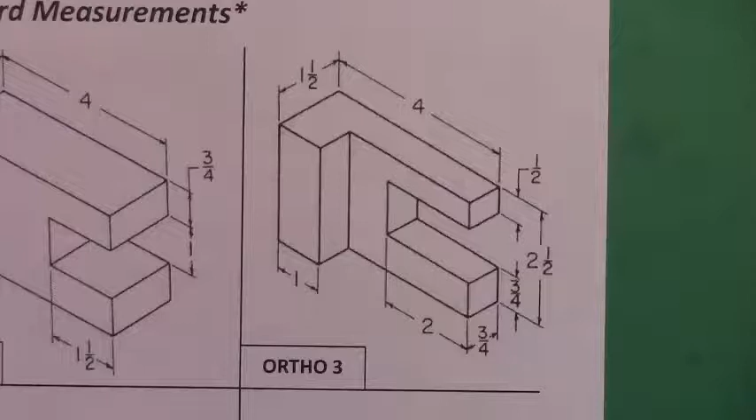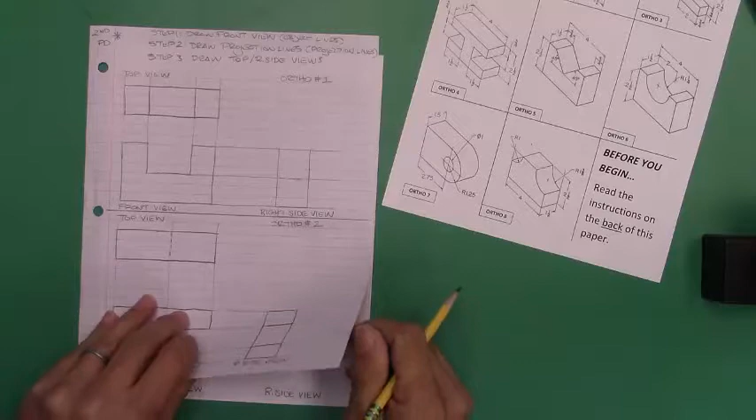Okay, in this video we're going to complete ortho number 3. Before we begin, let me talk about what we've done and where we're headed. If you were here last class period, we completed 2 drawings: ortho 1 and ortho 2. If you were not here last period, simply pick up with ortho number 3 along with the rest of the class.

This is the space we're going to use for our next drawing. Let me also talk a little about this worksheet. If you put it out in front of you, you'll notice there are quite a few drawings we're going to complete today—8 total, 2 from last class and 6 more.

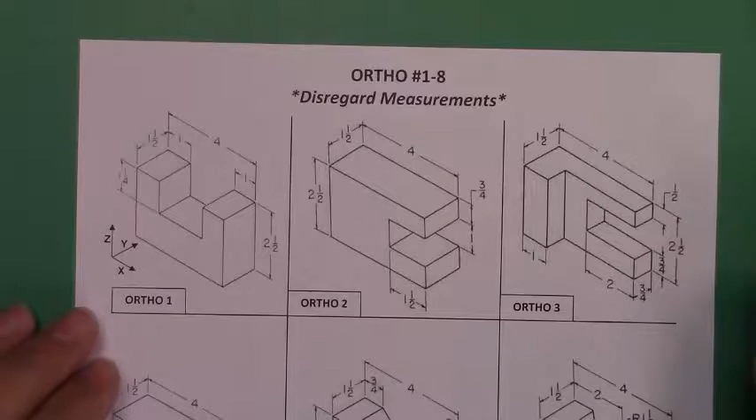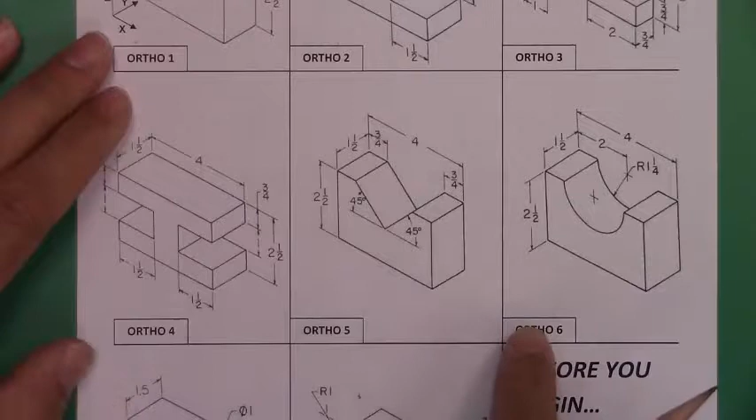You'll notice on the top it says disregard measurements, so let's not worry about any measurements on the paper. Each one is clearly labeled with the orthographic drawing number. We did these 2 last period, now we're picking up with number 3, and we'll then move on to 4, 5, 6, 7, and 8. You can see we're now including arcs and circles, along with vertical and horizontal lines.

Before we start, we're going to read the instructions on the back of this paper. Go ahead and flip the paper over. You'll see this much clearer on your paper, but follow along with me.

First, the step-by-step instructions: you need a sharpened pencil, an eraser, and your notebook, which has the paper we'll be drawing in. No rulers—everything is freehand. If you have not set up your paper, your teacher or substitute should have shown you the instructions on how to set up your paper for these orthographic drawings.

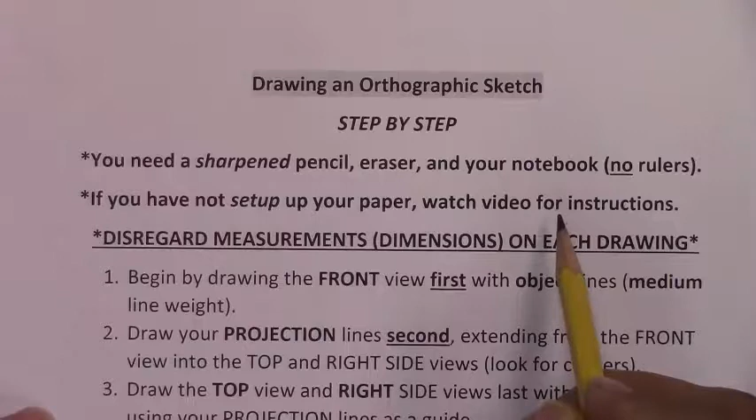You should now have 2 sheets of paper: one for ortho 1 through 4, and a new one for ortho 5 through 8. Disregard measurements on the drawings as mentioned—take what you see and try to redraw it as accurately as you can.

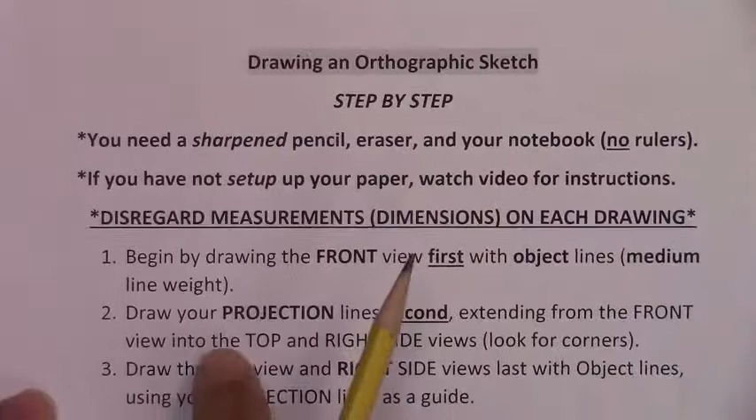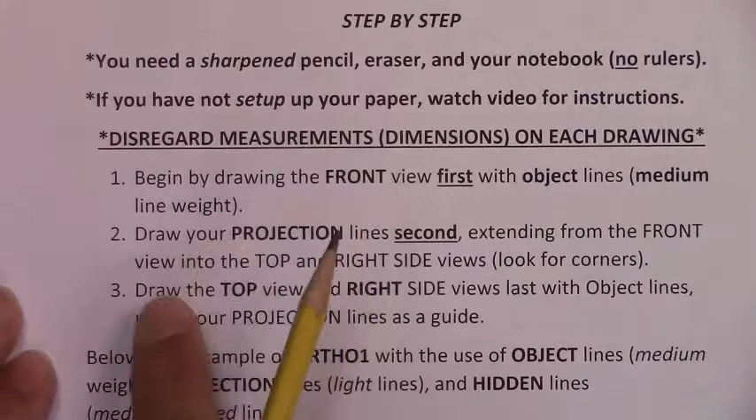Here are the simple steps, which we discussed in class. Number 1: begin by drawing the front view first with object lines, using medium line weight. Number 2: draw your projection lines second, extending from the front view into the top and right side with light lines.

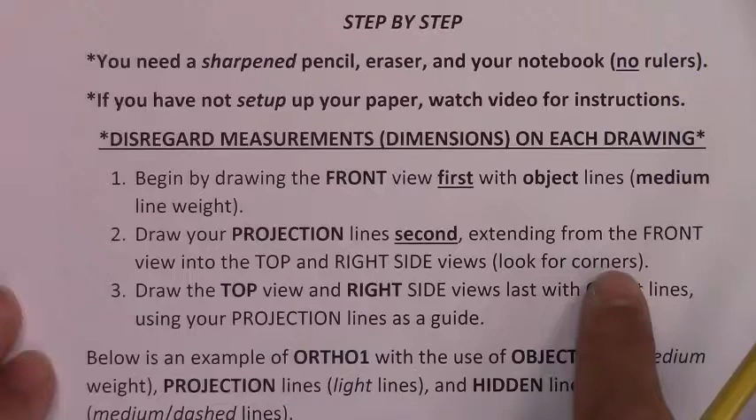We're always looking for corners. Depending on the view, from front to top, look for vertical lines; from front to right side, look for horizontal lines. Last but not least, draw the top or right side view.

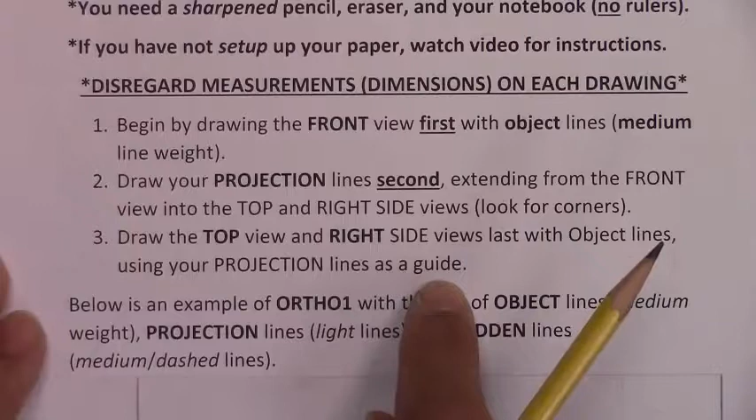It doesn't matter which one you decide to start with—object lines, once again medium weight lines. Use your projection lines as guides. Also remember, you may have to include hidden lines as well, which are the same weight as object lines, medium line weight.

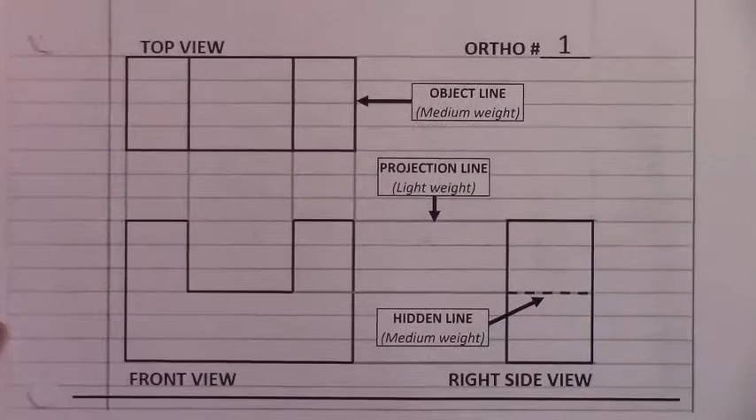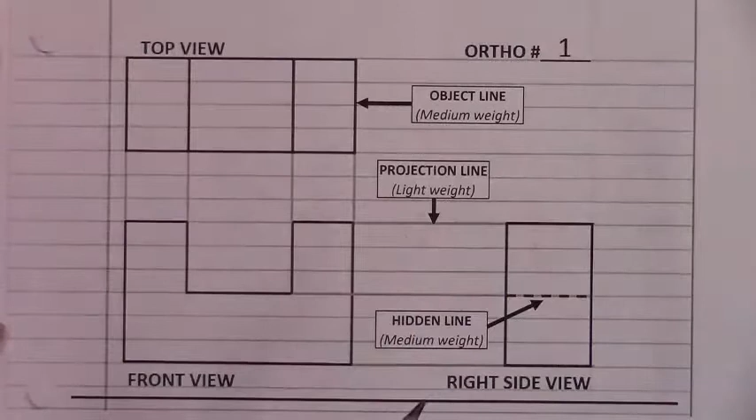If you look on the lower half of this paper, here is an example of something we did last time. You can clearly see the difference between my object lines, which are darker, and my projection lines, which are lighter. You can also see I included a hidden line, which is a dashed line, the same weight as my object lines.

So we're now going to go ahead and begin ortho number 3.

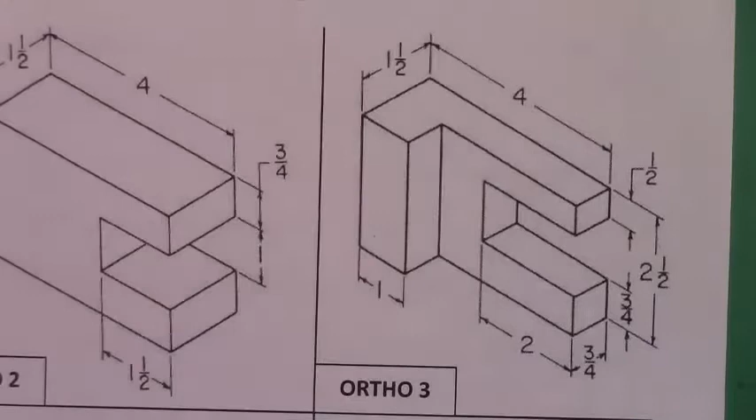Let's take a look at this paper and examine this drawing real quick. Here's how the format's going to work: you'll hear me talk a little about the drawing, and I'll then either draw the front view or not. Your teacher or substitute will then pause the video, giving you time to complete the missing views. They'll hit play and you'll then watch me draw the remaining views.

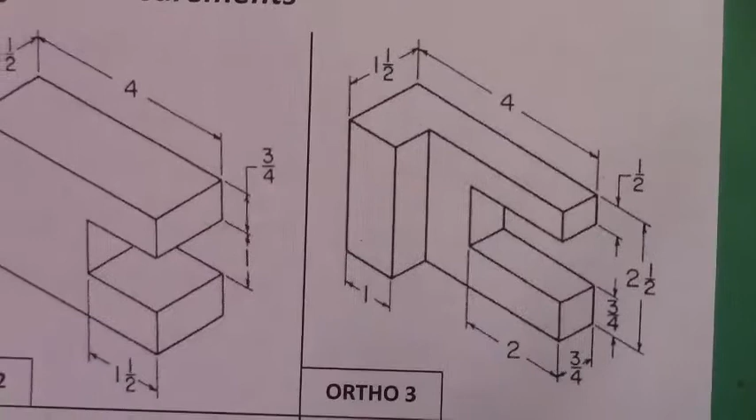So let's take a quick look at ortho 3. First, we always start with the front view. You can see there are 2 faces—here's a face and here's a second face. That's going to be the first thing we draw, the front view of this object.

We're then going to extend our projection lines. We can see that the top view is going to have this face. But if you look here, something has been cut out from the object. We probably will find that there could be some hidden lines, or a hidden line, in the top view.

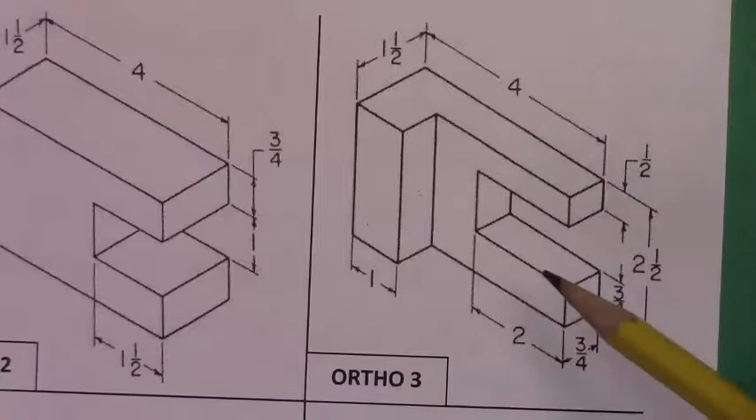And then when we draw the right side view, you're looking at the object from this direction. There's a face here, and a face here, along with a face here. So we're going to make sure those faces are drawn accurately. Once again, objects are drawn accurately with the correct use of projection lines.

So let's go ahead and I'll get you started. We're going to take this drawing here, so keep it next to you. And we're going to start off by drawing the front view. Remember, we're going to see 1, 2 faces to get this drawing started.

So let me begin it, and then you can finish it with the time your teacher is going to give you. Let me go ahead and just zoom in a little bit to my front view here. Remember, make sure you have enough space for your top view. So here's my front view.

Okay, I'm going to go ahead right now and draw what you are also looking at on your paper. We can see right here, it looks like there is this rectangular shape. Remember, I'm drawing with object lines.

And then you can see that there's a shape that almost looks like a U on its side. I'm going to draw that second. You probably remember that these drawings were done in Inventor, which is why they probably look very familiar.

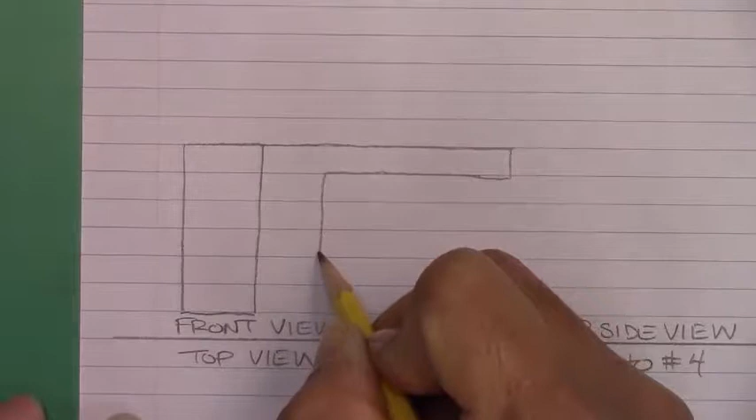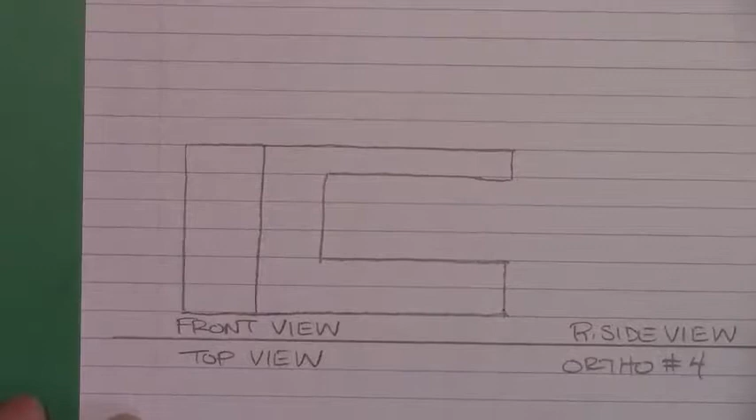And I'm going to try to keep things as close as possible to the original. Okay, now once again, draw as close as you can to the original. The reason I made these two different is because one is thinner, one is a little bit wider, and that's why I made these two look different, just like the drawing.

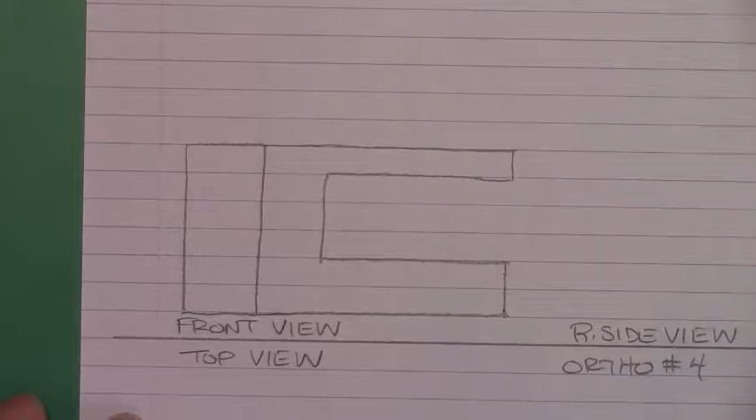So at this point in time, your teacher is going to pause the video. I'd like you to extend any projection lines that you have and then finish the top and right side. So let's pause the video.

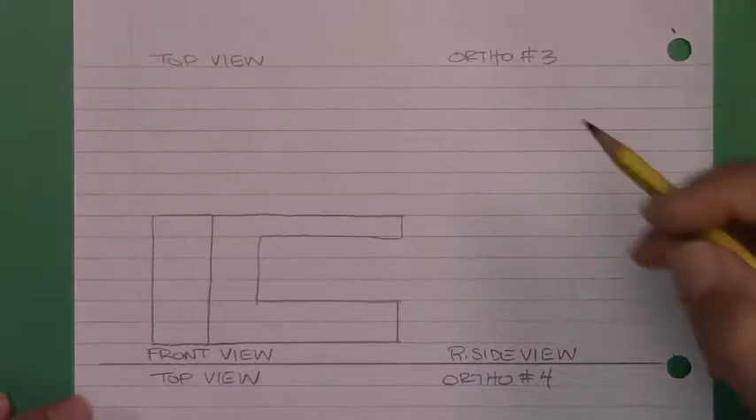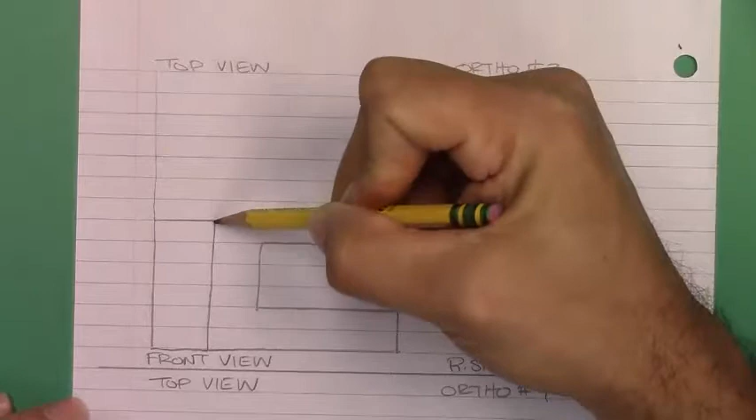Okay, so let me go ahead and show you how we finish this drawing. First of all, projection lines. I'm going to find corners and vertical lines. So I should have a projection line here. Keep them light. Here. Another one here. My last one will be here.

4 projection lines. From front to top, you should have a total of 4. 1, 2, 3, 4.

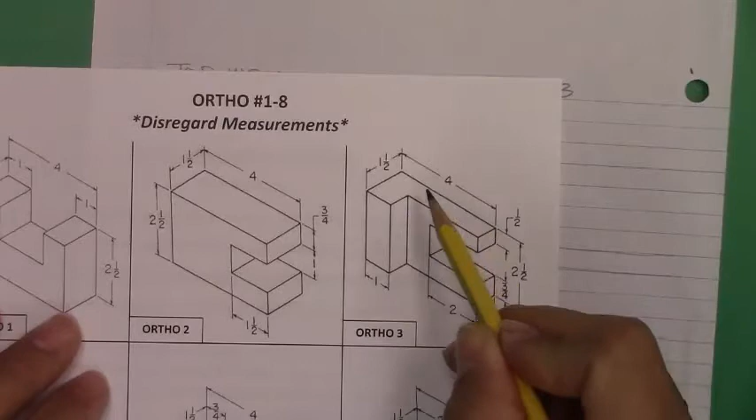Now let's take a look at the drawing again. So we can clearly see there's this piece here, kind of looks like an L shape. I'm going to draw that first.

I'm going to extend this line all the way over. I'm going to stop here. As we can see, this is where the drawing stops, the object stops, so I'm going to come down.

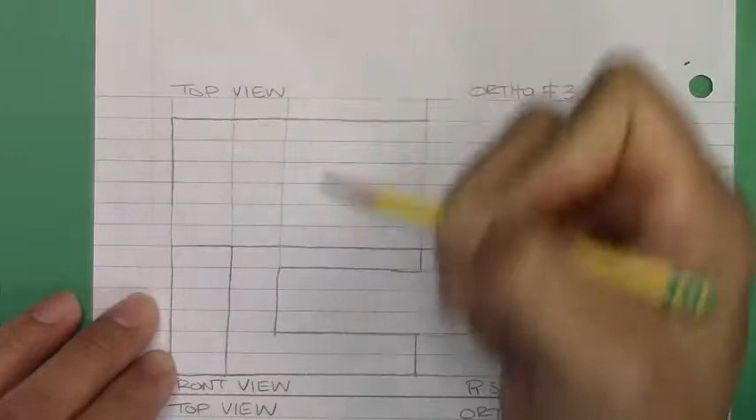Now when I draw this next line, I've got to be careful. There's lots of projection lines here. So I'm going to go from here to here. I'm going to stop.

Then I'm going to go up. I'm going to come over. Now I'm going to stop here.

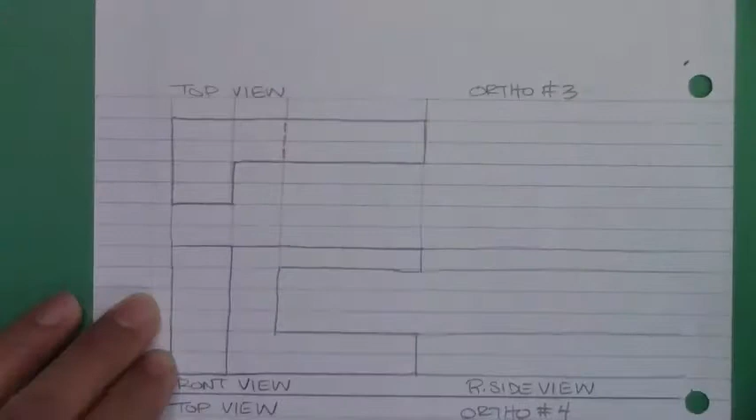If you did this correctly, this represents this cutaway. This should be a hidden line, which once again is a dashed line with medium line weight.

Now let's take a look at your right side view. Looking at the drawing, you can see these 2 square or rectangular faces. There's another face here, and there's another piece here.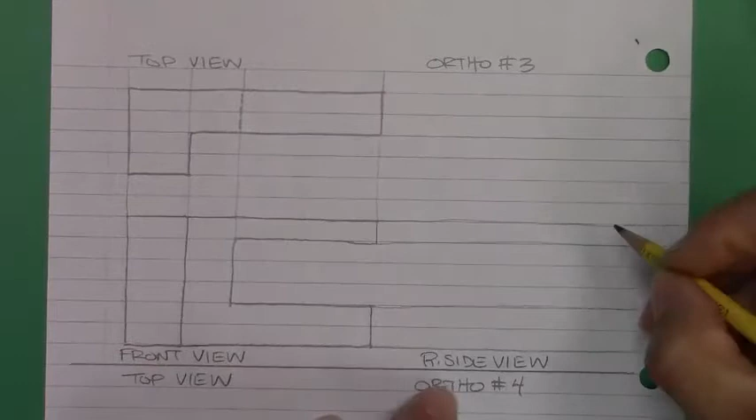So the way this is going to be drawn, I'm going to start with one part of the puzzle. And then I'm going to go ahead and draw the other part.

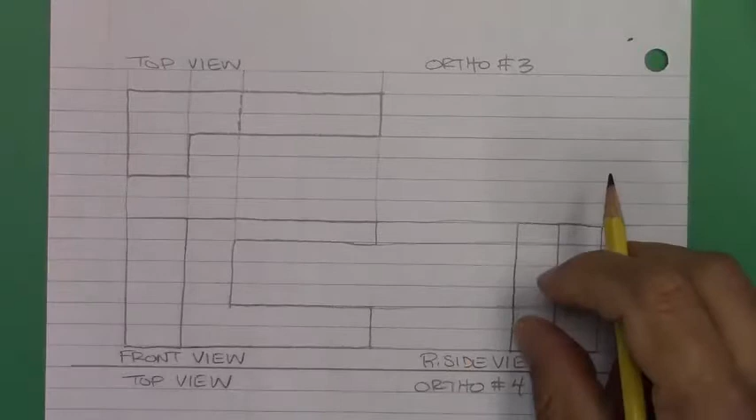Now there's these 2 projection lines. Be careful. These projection lines are referring to the lines that go here and the lines that go here. There are no object lines here.

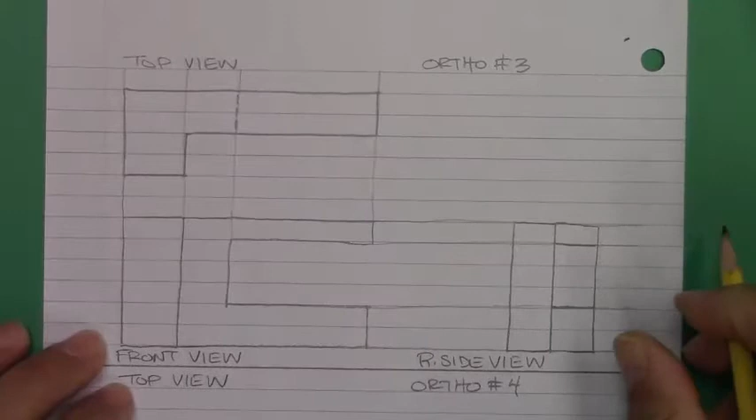Okay, go ahead and take one last look at the final product. Check your work, and if you were able to get this, congratulations. Let's now move on to Ortho 4.